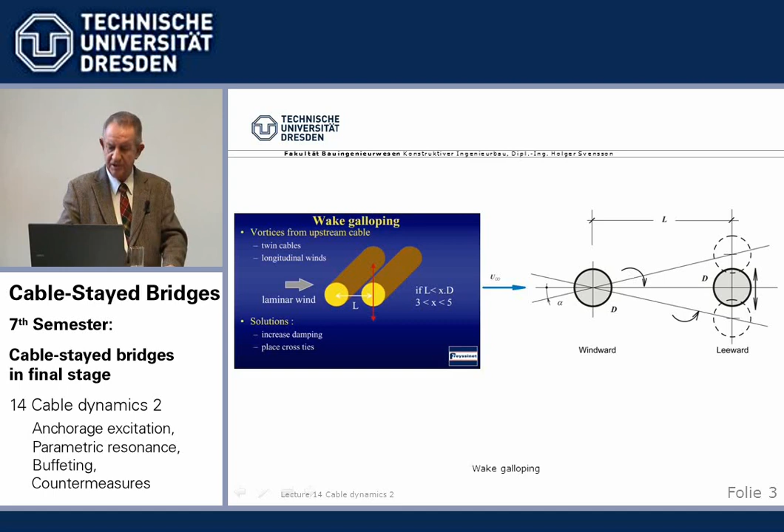I'm not really sure why Kovacs made this galloping. So I just mentioned there is a phenomenon which is real. If we have, especially with the backstay cables, if they are close, we sometimes have to make connections, stiff connections between the two, so they cannot oscillate independently, and with that the phenomenon is solved. So this was just for theoretical completeness of galloping.

Now we come with the next two points to something like what I call internal resonance. It has basically not to do with wind, as we had for the aerodynamic excitation, but it has to do with frequencies, movements in between beam, tower, and stay cables. The first is the anchorage excitation, and it's easily understood.

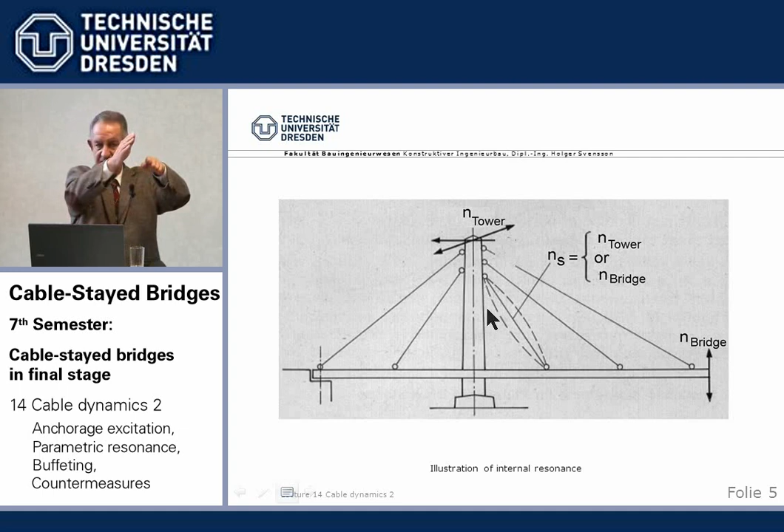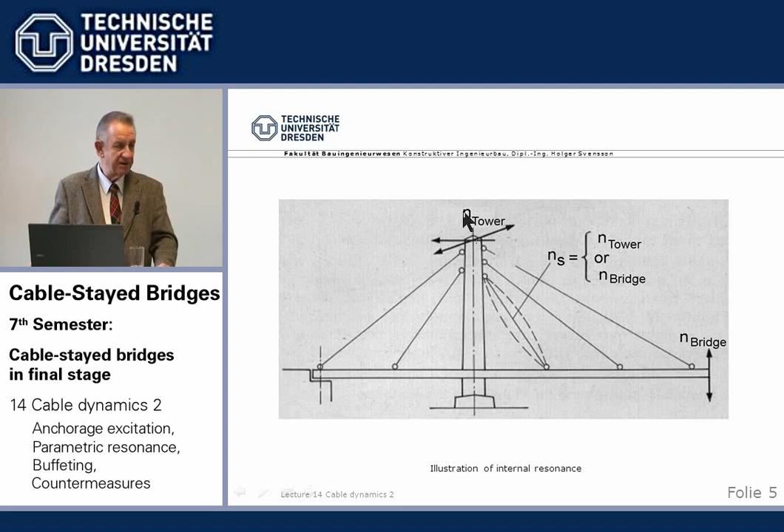Our cables have a sag, and if an anchor point, normally at the beam or at the tower, moves periodically, maybe by wind excitation of the beam or the tower, then we have again the phenomenon of the, say, clothesline with the sag, and if we pull here a little bit in the right frequency, then the thing will oscillate. Very simple. We have all experienced it in some way or another, and naturally this occurs if the frequency of the cable is identical either with the beam or with the tower frequency. It occurs, and so we have to do something against it.

These internal resonance amplitudes have to do with the different masses involved, which is we have high masses in the beam or in the tower and comparatively small masses in the stay cable. And if we have a not unusual ratio that a deck is 225 times heavier than a stay cable, then that's not unusual. And then I saw here the formula missing. There should be a square root of this mass ratio. We have to fill it in. So the amplitudes are in the range of the square root of the masses.

In this case, conveniently, the figure 225 was chosen because the square root of 225, as we all know, is 15, a straight number. So in this case, this little amplitude the bridge may have, even by traffic excitation, if we have trucks in a certain frequency, will be 15 times increased in the cable amplitude. The square root of the ratio of the masses gives the ratio of amplitudes. If we have here an amplitude of 5 millimeters, we will have 75 millimeters in here.

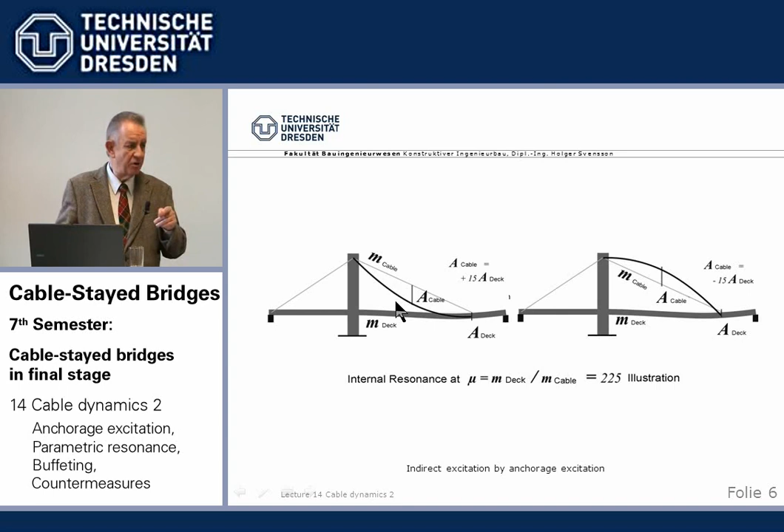So it's not bringing the bridge down, as I told you, but it's a nuisance. And it may cause fatigue problems, so we don't want it. Normally it's not really a problem because the lowest cable frequency and the beam or tower frequencies are different. They are not normally in that ratio that this occurs, but it can from cars or so, from trucks.

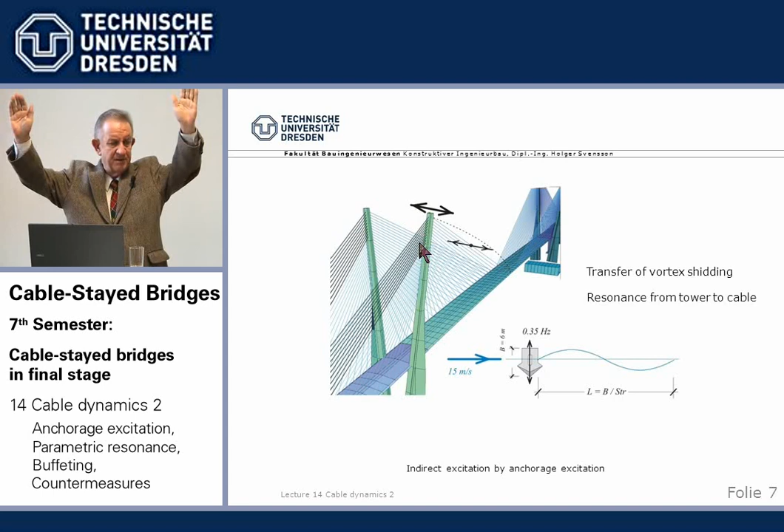Also, what may take place is if we have freestanding tower legs. There may be, due to vortices forming, just the vortices from one side to the other, and they exert forces on the tower. And now when the tower starts to swing this way, the cables will swing transversely. That can happen, and so one has to do something against it.

You may say, yeah, well, I mean, who's so stupid and making the tower legs like this? That's no good. We rather have an A so they support one another. Yes, but the architects sometimes come up with these, and there are two.

One cable-stayed bridge, Vladivostok, Golden Horn, is under construction with towers like this. And the Fehmarn crossing, Baltic Sea crossing, the bridge design also has these towers. I was involved in both. I wasn't quite happy. I told them from the beginning, listen, we have vibration problems. We'll put some dampers in, good enough. So, okay, you can do it. But from a dynamic point of view, it's not a good solution.

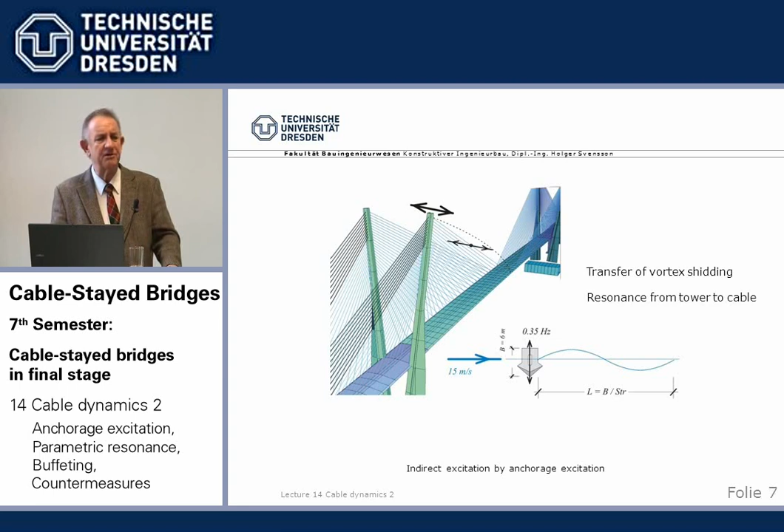And in fact, there are dampers provided in both cases. And I always think, we'd rather design bridges which do not require damping, if possible. There is another phenomenon which is more difficult to understand, I felt. And that has to do... it is active also on a vertical cable. Now, with the anchorage excitation, we thought about an inclined cable with a sag, and we pull it and the sag goes in and out. We understand. Now, if I have a vertical cable and I pull it, where's the phenomenon to get that excited?

Well, there is another possibility of parametric excitation of a stay cable if we vary, in the first eigenfrequency, a parameter which determines the eigenfrequency. I told you eigenfrequency, square root of cable force, and 1 divided by length. So practically what we can do is we can vary the cable force. And if we have a vertical cable and we pull it with double the eigenfrequency, then after some time the cable will oscillate transversely. Just believe it, know it, it is there.

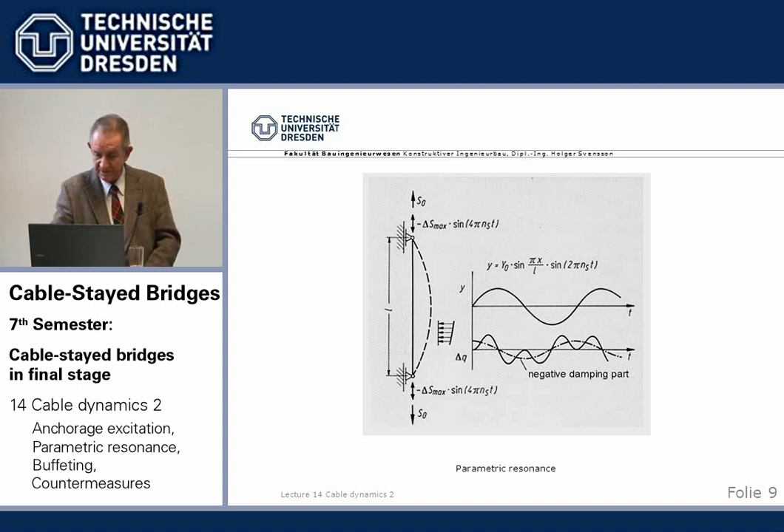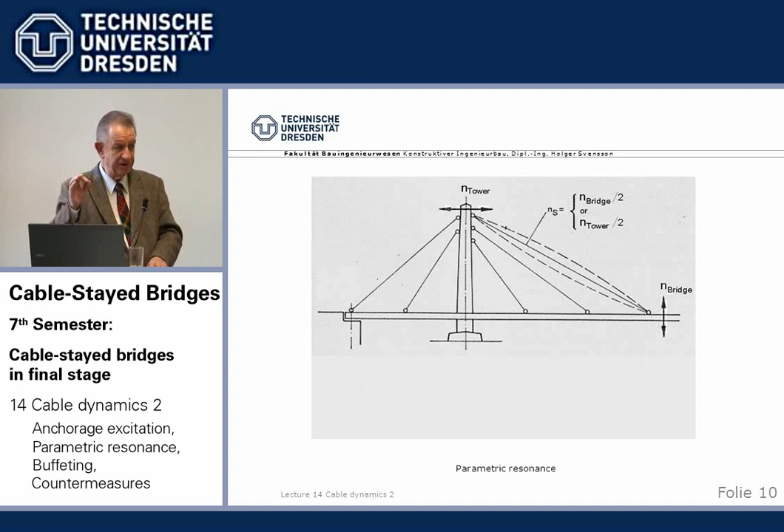I'm not aware that this really has been a problem with cable-stayed bridges, but parametric excitation, double the frequency, a vertical cable will oscillate transversely. Just keep it in mind. Of course, it also works for an inclined cable but it's not by taking out the sag, it's by changing the cable force due to vibrations. It's theoretically fully distinct. Practically, I think it's hard to distinguish.

Now, the final phenomenon is if we have turbulent wind, which has the turbulences in random frequencies. Then we know if a turbulence hits a cable, it's like a load, the cable will deform a little bit and then comes back. And now, statistically, we can find that from these random turbulences, there will always be a few just in phase. Say 20 will be at random and they will not do much harm to the cable. But from these 20, 2 or 3 will just hit in resonance when the cable is just out or back, and so on.

And so from this, say, random resonance, we get a certain excitement of the cable, and with real-time statistical methods generating some random wind and so on, one can mathematically show what it would mean. And we had this phenomenon at the Helgeland Bridge in Norway, which I will show you later in some detail, which had extremely high winds, very high storms, plus the wind came over a series of mountains called the Seven Sisters. And because of that, it was a high turbulence, 25%, which is very much, otherwise 5 or 10.

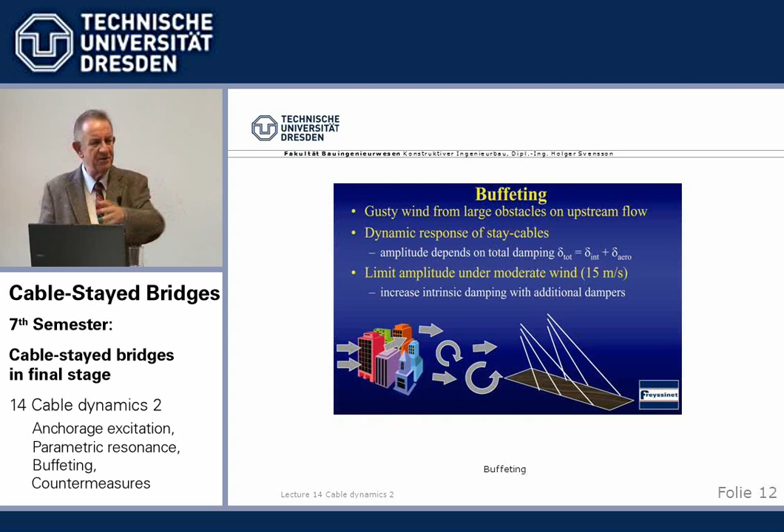So if we have a very bad wind climate, high turbulence, just the buffeting of the turbulences statistically can give us problems.

Now we have then the vortex shedding, which is a very general phenomenon, which we can also see on lampposts or even cooling towers. There are vortices forming, von Karman vortices, which shed one side, the other side, and by that exert transverse forces, governed by the so-called Strouhal number. If the shedding frequency falls together with the eigenfrequency of the cable or the lamppost, then there are small but constant forces acting on the structure and causing vibrations. I've seen it several times on vertical lampposts in wind, when you put your hand on, or even stronger, see it.

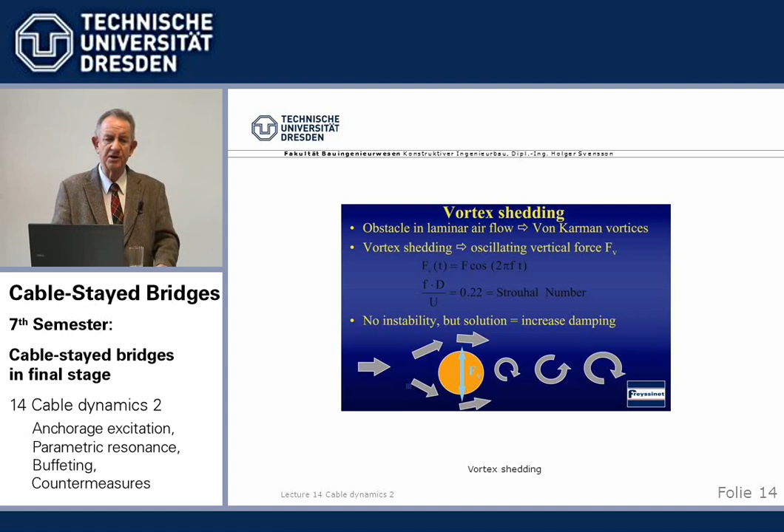It is a well-known phenomenon with those collapses of circular tanks, silos, where Mr. Scruton, a famous British aerodynamicist, found the so-called Scruton helix, where he took a steel profile around a large tank, and by that broke the vortices up. Scruton helix. So it's a phenomenon well known, but only in exceptional cases dangerous. Now, we are through the various excitation phenomena.

What to do about it? I'm just going one step ahead, not just the cable excitations, but the whole bridge vibrations. In the early times of suspension bridges, long span bridges, it was the one and main cause bringing bridges down.

We'll have it in the overall dynamics later on. So this phenomenon was known since a long time, but people couldn't make head or tail of it. Only since we understand the mechanism can we mathematically formulate it. And then we can also define a damping at what place, what size, which will suppress it. And since we can do that, the real danger is out.

We are not too optimistic that we now can calculate everything in advance. Some things are quite clear, something has to be done, and we install dampers or things like that before. Sometimes it's not clear. And then it's not bad to say, okay, we are prepared if the cables oscillate. So we install already anchorage points for dampers or tie downs or whatever, and we just wait and see. Maybe nothing happens. That's not a bad politics, but at least you should prepare the anchor points, even if you say, well, I don't know.

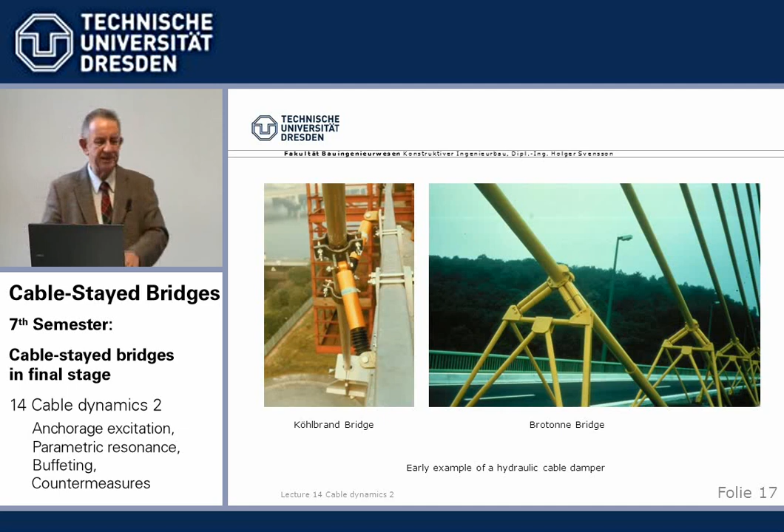And now this is just pure poison for the seals inside a hydraulic damper, that you have these permanent, very small movements. And so the result was that these always had to be exchanged after about 1 year, because the O-ring seals were destroyed. So there was a little shortcoming. Of course, there were better dampers being built and so on.

There were then, for Normandy Bridge, for example, first, later Rion-Antirion, which I've shown you and we will see later in detail next semester. This rather primitive car shock absorber business I showed you here has then been refined and hidden, and a layman will not see that this is a hydraulic damper which is inside here with lever arms and things like that. But it's the same principle, hydraulic dampers.

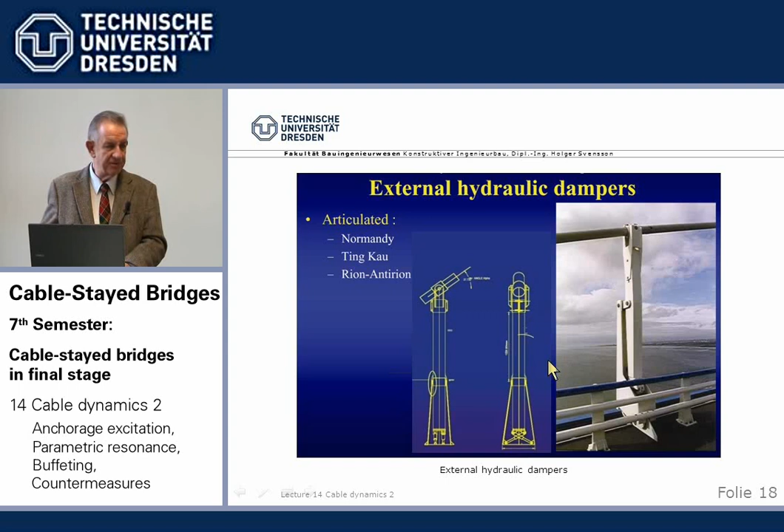Those were what I call outside or external hydraulic dampers. There is a principally other idea which I compare with the motor for cars. Our standard has vertically up and down going pistons. And there was this certain inventor, a German named Wankel, who had a rotating cylinder. And that's the same here.

We have inside here a rotating cylinder which is eccentrically supported in the center. So when it rotates, these chambers change in thickness, so to say, from, I don't know, 5 millimeters to 25 here. Just think eccentrically supported, rotating, then this point where it's closest to the outside of the cylinder rotates around here. That means in this way the fluid has to be squeezed around like in a Wankel motor. The chambers are going around. So that's, I would say, an elegant solution.

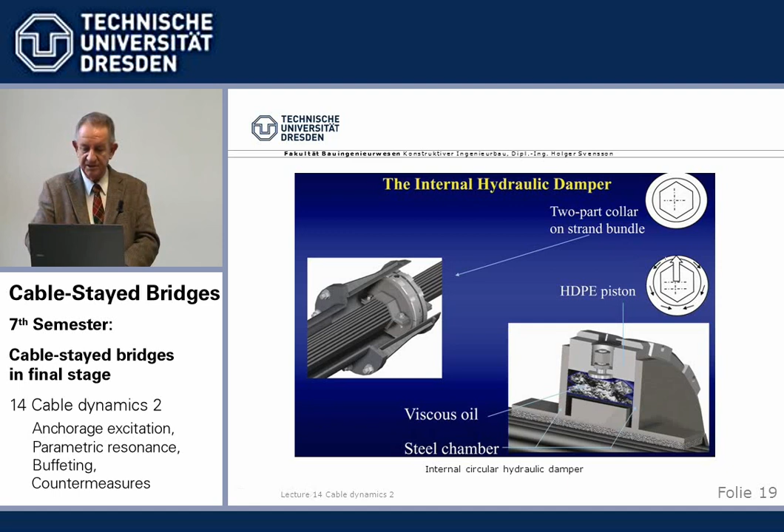However, there's something better which Kovac, I'm not saying he has invented it, but he's very much in favor. He always uses friction dampers. Now, a friction damper is basically the principle of disc brakes in a car. We have, so to say, two discs, and we press them against one another, and there is a high friction surface which in a car brakes the speed by exerting friction on the axles. And the same is here. These two work against one another, one is externally supported, one on the cable. Again, friction work takes place, it warms up, and by that work energy is destroyed, which is damping.

And it's a little difficult going into, but the thing is, if this would be the required damping level for galloping, which we take as an example for cables, then we have, first of all, a certain eigendamping of the cable. You remember the logarithmic decrement, 0.01, something like that I showed you. This is delta and this is the amplitude of the cable. You need a minimum movement of the cable to get the friction started. Otherwise it's just fixed, it doesn't work. And during that time you have only the eigendamping of the cable itself.

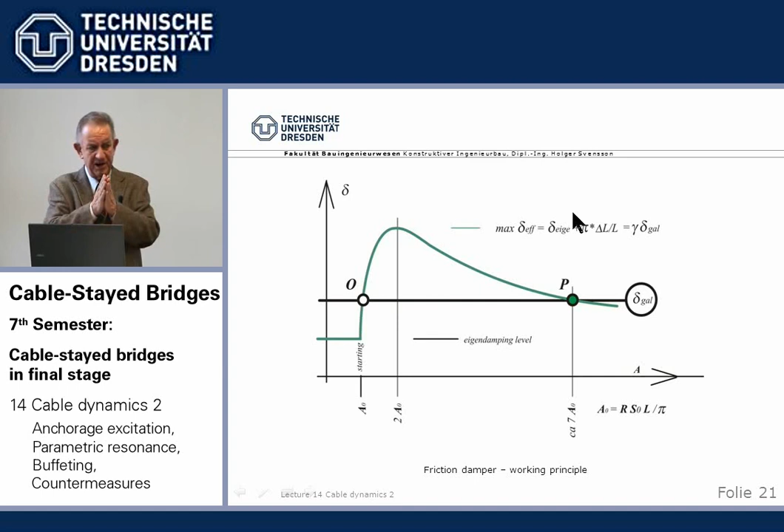After we have reached a certain minimum amplitude, they start to slide against one another, and the friction is activated, and this work is the damping which reduces the oscillations. It's a more elegant solution, and it's not so maintenance prone. These disc brakes go on for a very long time. We have one other phenomenon here.

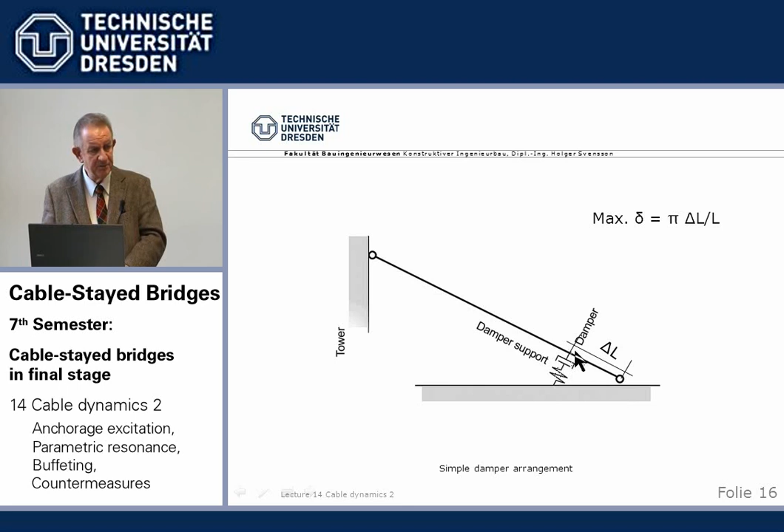Let me go back a few. I've told you the damping is proportional to this distance, delta L. Okay, beautiful. Now we increase that as long as we can and have a good high friction. Yes, sir, but at the same time we have longitudinal movements of the cable, strain, small, but still, if over several meters added up, it comes to a few millimeters from these oscillation phenomena. And that means we have here small movement, a few millimeters, but it's there. And so that has to be taken into account.

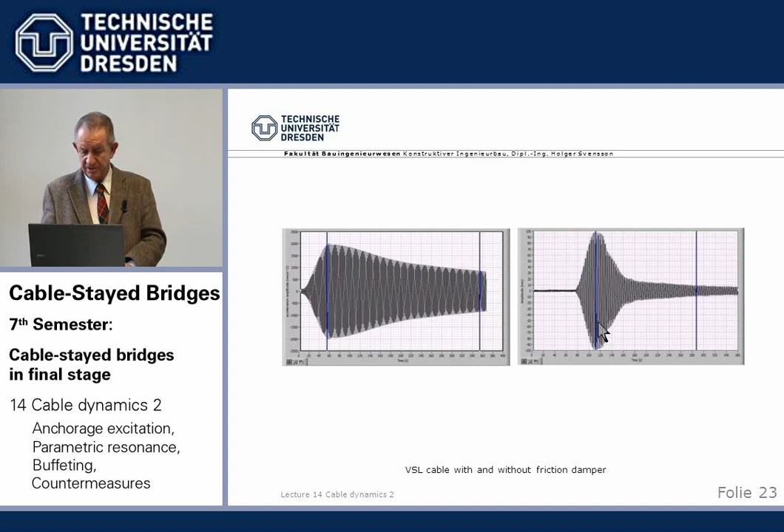We cannot make this rigid between the cable, which has longitudinal movement, and the outside, maybe a steel pipe or something. And now there are various ways to do it. I'll just give an example. VSL uses elastic plates to take up the relative longitudinal movement between stay cable and support, whatever that may be. And here we see naturally how beautifully these dampers work.

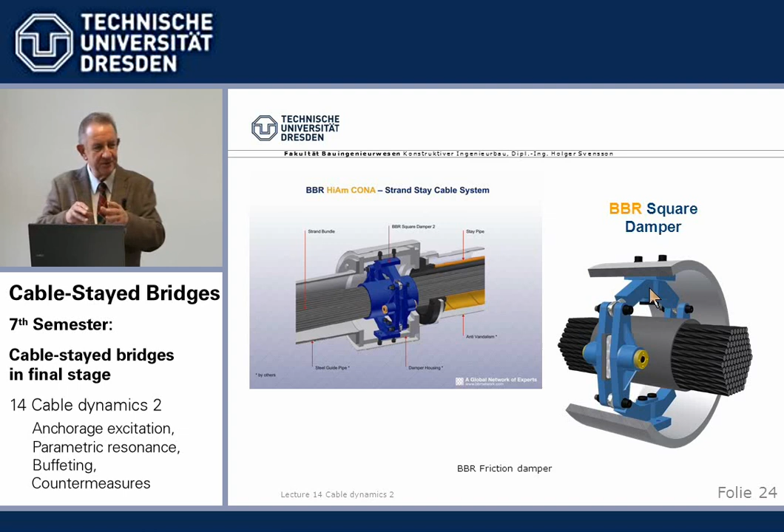BBR has a completely different story for taking up the longitudinal movement. Again, you remember, the further we are away, the more effective the damper becomes. However, the bigger the relative movement becomes. Both go together. There's no such thing as a free lunch. We've got to pay for some advantage with some other. And so they have a very intricate, these are the brakes in here, mechanical mechanism. I've seen a model of that, which looks very nice. So it's not elastic there like Freyssinet, but it's a mechanical hinged system which can take up these little movements. So there are all things under preparation.

And in development, the big cable fabricators, VSL, Freyssinet, Shinko, BBR, I hope I haven't forgotten one. They are constantly developing their systems, and it's interesting to find out what is the latest.

There's a third possibility. We had hydraulic dampers with a fluid squeezed through tight places. We had the friction dampers with disc brakes. And the third is elastomeric dampers, which very simply is that we support the stay cable, say at the tip of the steel pipe, with this neoprene ring, I normally call it.

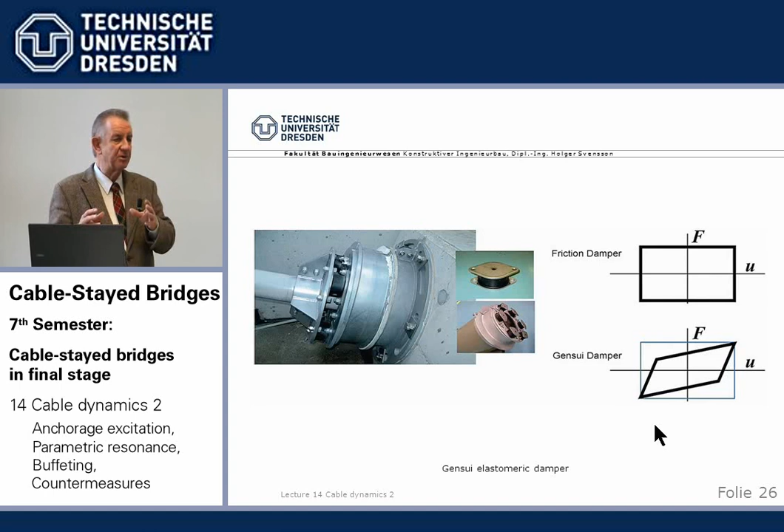Instead of the neoprene, we use an elastomeric which has internal friction characteristics. So it's not just elastically deformed by the cable oscillations, up and back, but by this elastic deformation, energy is dissipated. A hysteresis curve like this is the reason. So just remember there's a rubber with internal damping characteristics which takes up energy, and thereby it also works for small cables, can be used.

There's another shape, again from Freyssinet. They call it Diabolo, where the stay cable is supported within a steel pipe, and when it oscillates, then this or the other support is squeezed, and by squeezing them there is an internal friction, so to say, within the elastomeric which consumes energy, internal work. Non-elastic. Elastic work doesn't consume energy. That's why we need sort of plastic dampers. There are no elastic dampers. That's impossible.

Now, I mentioned before, this was once we have the cable installed and the thing is vibrating, what to do? Various 3 types of dampers. However, much more clever naturally is, instead of damping the oscillations, try to avoid them from the beginning. And that can be done by preventing the forming of these rivulets, as I was talking about in wind-rain induced oscillations. The whole thing here is mainly on wind-rain induced vibrations. They are catastrophic. They can destroy or really damage stay cables. All the others are a nuisance and we have to suppress them, but they're not really bad.

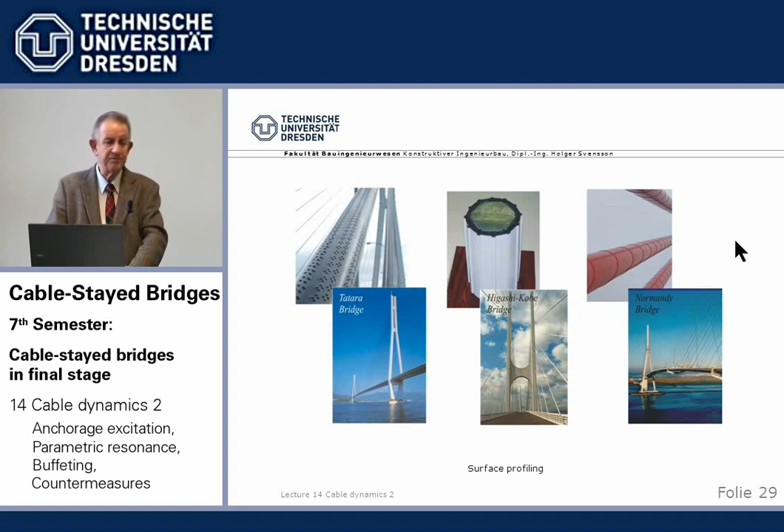We have here longitudinal protrusions, I call it. They can be put on easily in the manufacturing process. And the third are helices. I told you about the Scruton helix, which he found for big tanks to prevent them from vortex shedding. And that's the same. They are normally like welds, a small plastic bar which is heated and then put on during processing. And these 3 have been used for various bridges. Tatara was world record, Normandy was world record, and Higashikobe is one of the major ones in Japan. So they have been tried and they work.

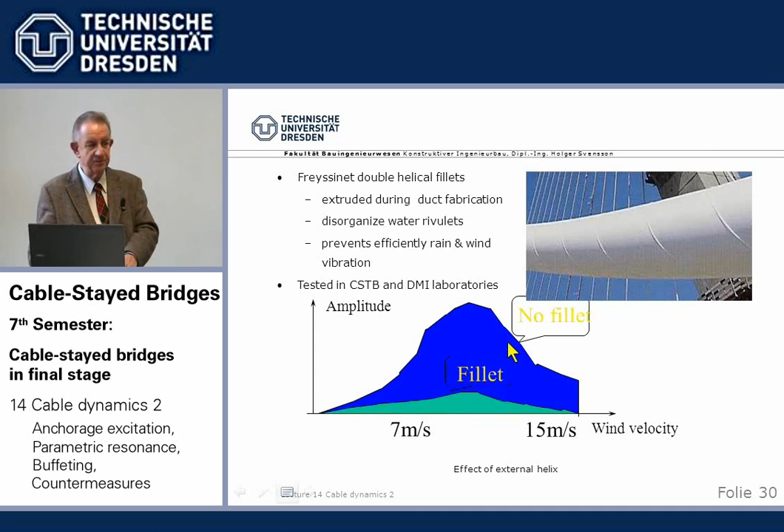Again, a test of what happens if we have a pipe in the laboratory, low wind speed, low rain, and we have the rain-wind induced oscillations. We have amplitudes at 7 to 15 meters per second wind, medium wind, and here are the amplitudes. We have these high amplitudes for about 10, 12 meters per second. If we put, however, just these helices on, as shown here, the amplitudes go down considerably. So the same effect, at least from this point of view, that we reach with more expensive and complicated dampers, we can achieve by just putting on these simple helices. Interesting, isn't it?

Now, the last thing we can use is cross ties, which normally go here to the tower, rectangular to the cables. It has been done, and it's quite obvious. I mean, these cables vibrate beautifully, tie them down. Here we go, problem solved.

Yes, in a way. First of all, we must be aware these are strands, so they act elastic. There is no damping or energy consumption. What we do is not damping the cables, but we change their eigenfrequency. Because by tying them down, we install a sort of elastic support, some elastic supports over the length of the bridge. That means the frequency is pushed up. So basically that's what we do here, and it can be very helpful against internal resonance, where the cable frequency is close to the bridge frequency.

There are, I would say, two disadvantages. The one disadvantage is optical. It doesn't look nice. I'll show you later the Helgeland Bridge in Norway, which I think is a very nice bridge. I always use the pictures directly after the end of construction, where those ties were not installed, because with the ties it doesn't look as nice, and there are other examples.

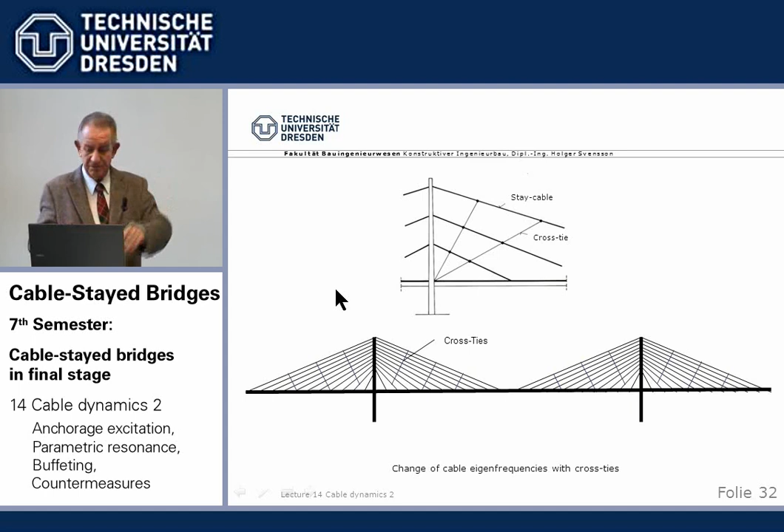Very long stays for parametric instability. You know what parametric instability is since today? Internal pulling at the stay cables. And they did a lot for investigation there. That was the first time it was really said.

By the way, it's interesting to note that the English word for bridge inspecting with mountain climbing equipment is Abseiltechnik. They use the German word for bridge inspection, it's called Abseiltechnik. Okay.

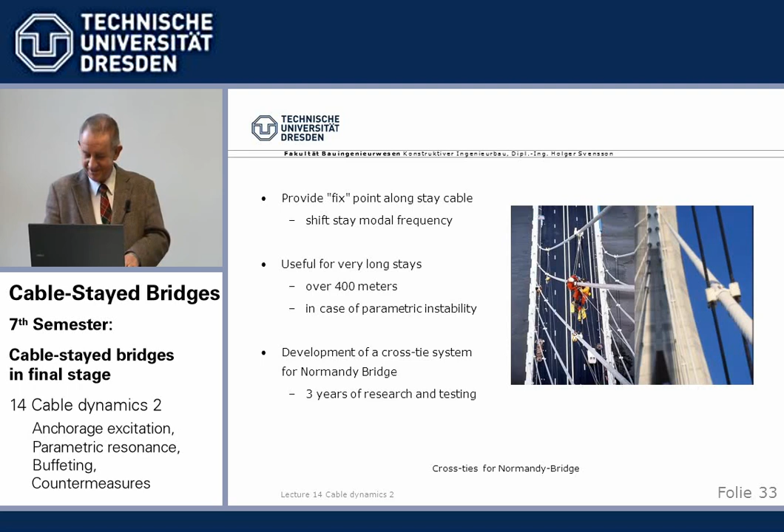Now, to sum it up, I think the movies have shown you what an important and detrimental phenomenon stay cable oscillations can be. So we have to take them seriously, and during design we have to try to find out whether there is a high probability that they will occur. In that case, we have to install some dampers, or if there is at least a danger, then we will prepare for later installation of certain types of dampers.

We've gone through the dynamic excitation phenomena of stay cables. The one overriding concern is galloping, especially rain-wind-induced galloping, because that pulls energy constantly out of the airflow. And so the amplitudes can grow theoretically beyond all limits. They can be very damaging, and so we have to be careful to avoid them. There are other wind-induced phenomena like buffeting and vortex shedding, but they are of limited amplitude. We must watch them, but they are not as dangerous as the rain-wind-induced vibrations.